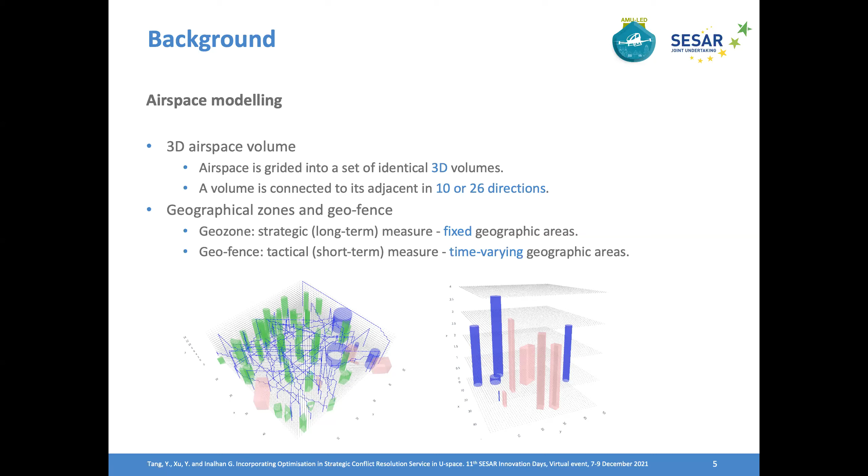Next, as stated in CORUS, to enable effective operations, the strategic conflict resolution service requires precise operation plans given the 4D trajectory to be flown. Well, obviously, to use the airspace efficiently, it requires the amount of buffer space around flights to be minimized.

However, some operations are not very precisely plannable for different reasons. And there are some discussions on how to identify the uncertainty buffers. In this study, we are working on...

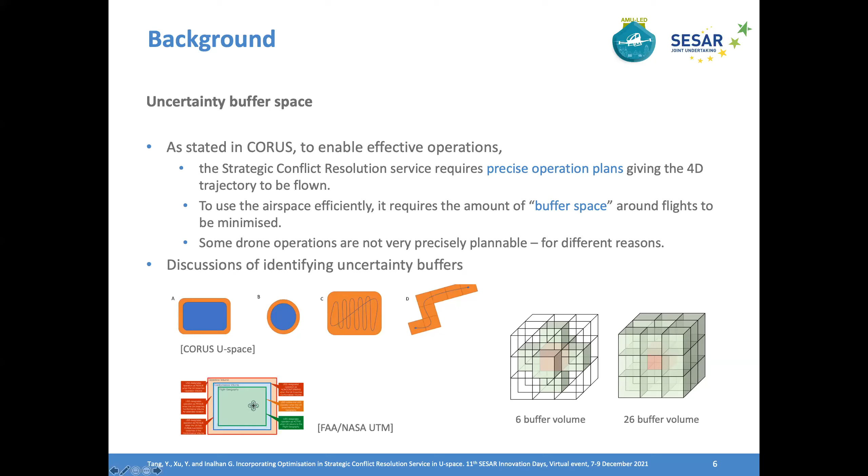As we are working on a gridded airspace, it is quite natural to consider the adjacent volumes of the essential point as the buffer volumes. For instance, imagine this red volume is the essential volume on the original trajectory. Then we can consider those 6 ones as the buffer volume, or 26, or even more, depending on the precision of the flight plan.

This setting actually raises this question: for linear operations, a specific volume can be an essential volume and a buffer volume at the same time. See this figure, example of a linear flight. The left side is the essential volume, the right side is added with the buffers. As you can see, a specific airspace can be an essential volume and a buffer volume at the same time, or it can be a buffer but associated to various essential volumes, as you can see.

And this actually changes the way how we define the flight plans for linear flights. To cope with this, we enforce the timestamps of the buffers to remain the same as their corresponding essential volumes. For area operations, it is more straightforward, as the whole period of time will be blocked from takeoff to landing. So the buffer volumes can be considered as a set of extended essential volumes.

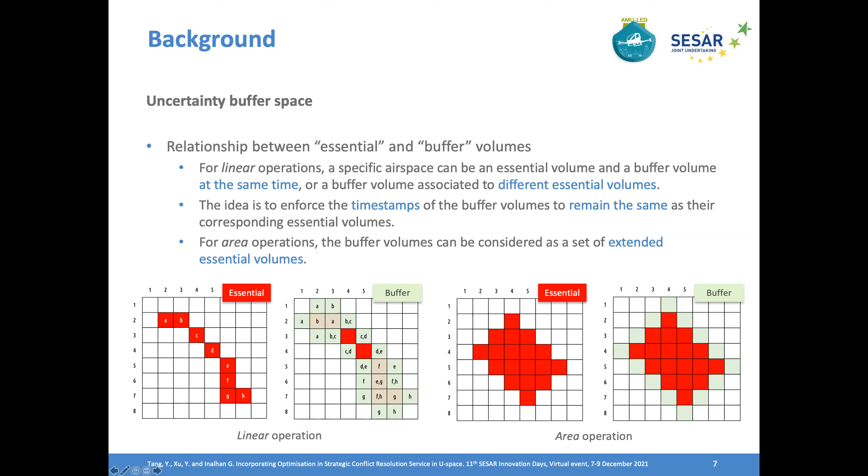Now, based on the specific forms of the flight plans we have just discussed, let us first use the FCFS approach to perform the deconfliction. More precisely, instead of first come first served, we should probably call it first submitted, first served, because the flight plans will be processed according to their submission order rather than the scheduled takeoff or landing time. Thus, an implicit rule would be that the flight plan submitted early will have an absolute higher priority than the later ones, unless there is a very high priority flight that requires a rerun of the process.

Here is the pseudo-algorithm for the FCFS approach. Basically, the fundamental of this algorithm is to have a common airspace representation to indicate the occupancy status of the 3D airspace volumes.

Flight plans will be processed one by one. Once a group of volumes have been occupied by some early submitted flights during specific time periods, they will not be available for other flight plans submitted subsequently. Those flights will be delayed iteratively until all their concerned airspace volumes have been cleared. In such a case, the new flight plan will take that time and space and extend the occupancy time with the length of the separation minima.

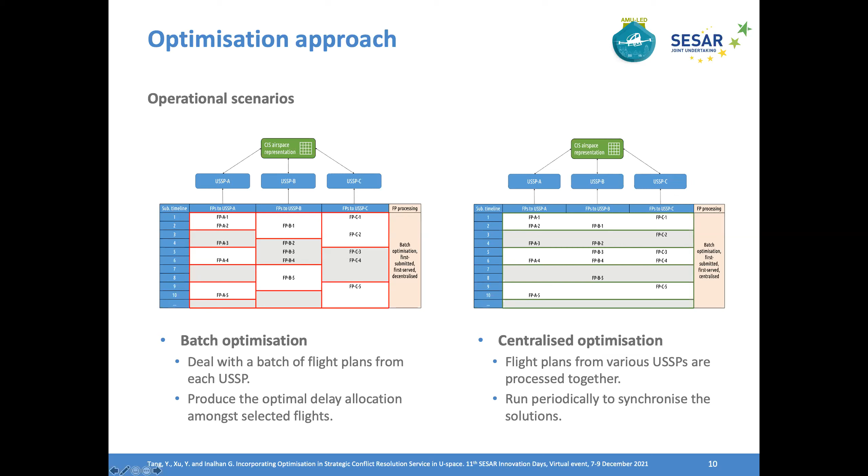Now, one may argue that such a centralized architecture may not be in line with what is expected from the CONOPS. Thus, we have considered a way to convert the centralized optimization towards a decentralized coordination scheme. Traditionally, as shown in this diagram, it is assumed that all the input, like the flight plans, are collected from the USSPs as a broker, to the same workspace, and then a central unit, for instance like a Common Information Service Provider, will compute the global optimal solution. This is a traditional centralized architecture.

But the model proposed in this study allows us to break down the single problem into various subproblems through a dedicated mathematical approach. It is envisioned that the operators submit the flight plans to the subscribed USSPs, and each USSP locally manages the database of the flight plans within its own workspace. A central unit is still required, but its main function will be limited to coordination tasks, exchanging specific information across associated USSPs. Using this scheme, we expect to obtain the same global optima as if in a centralized way.

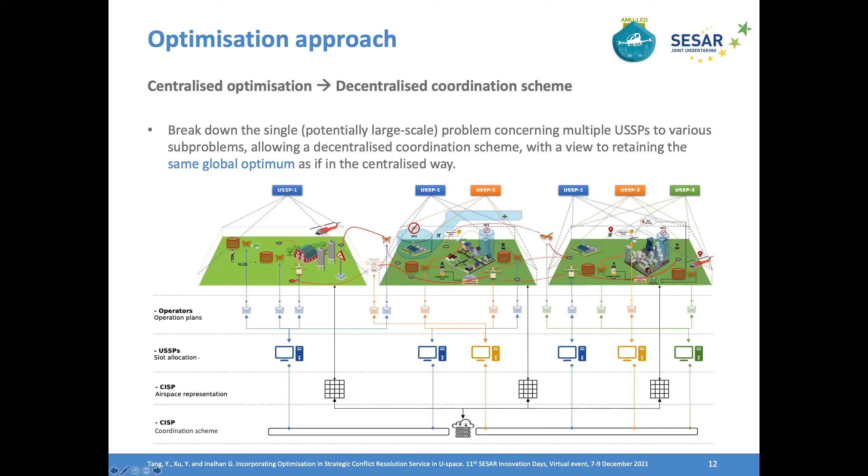Okay, some quick brief about the model formulation. In general, the objective function is to minimize the overall delay costs for both linear and area flights. A weighted cost can be specified for an individual flight to reflect its priority level. As presented, some operational constraints are specified based on their submitted flight plans, which of course are different between linear and area flights.

Well, the most important constraint is the separation assurance. The idea is that at each valid airspace volume, it can be only occupied by one flight within a valid sliding time window with the length of the separation minima. The reason I'm saying valid is because there would be some pre-processing to remove those volumes and times that are predicted to not have any conflict issues. By doing so, we can largely improve the model's computational performance.

In this figure, we have 3 linear flights using the same volume, reaching the same airspace volume at different times, as highlighted in red color. If we're using this format of flight plan similar to manned aviation, then it's quite simple. We just need to move this time window from top to bottom and add up every cell inside, and ensure that there will be no more than one cell occupied at one time.

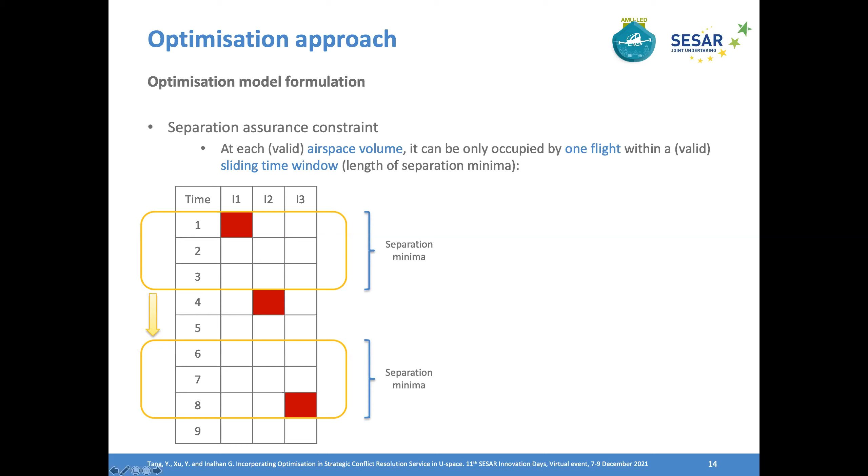However, once we have considered buffer volumes and special area flight plans, it becomes a little tricky. For instance, in the bottom box here, we captured two cells occupied: one here, the other here, but they are actually from the same flight, L3, as you can see. One represents the essential volume, and the other is actually its buffer volume. To cope with this issue, we have devised a piecewise function and converted it into a linear formulation and incorporated it in the whole model.

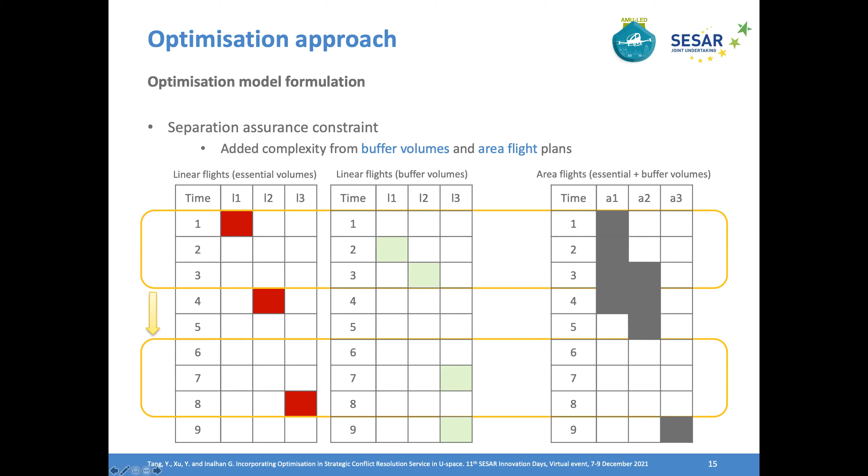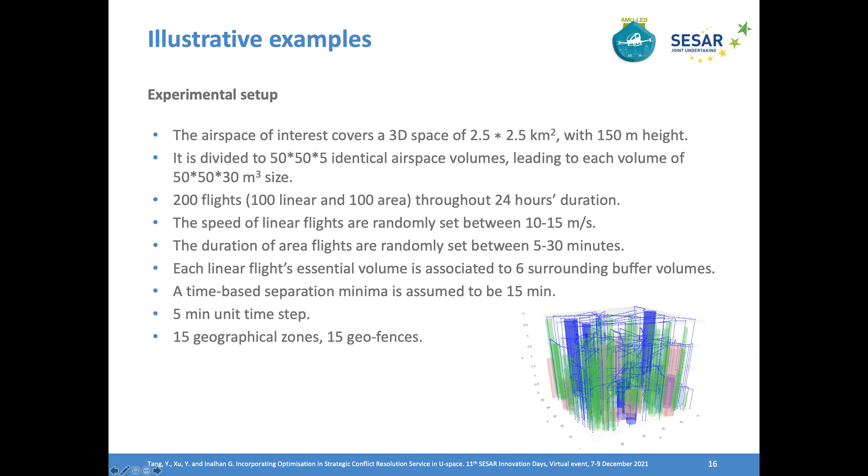Let's see some illustrative examples. The experimental setup is presented here. A 3D airspace of 2.5 by 2.5 square kilometers with 150 meters height is divided into 50 times 50 times 5 identical airspace volumes, and 200 flights coexist during a 24-hour duration. The initial flight plans are randomly generated, including their submission order. Of course, any of these numbers can be adjusted; we simply chose these values for illustrative purpose.

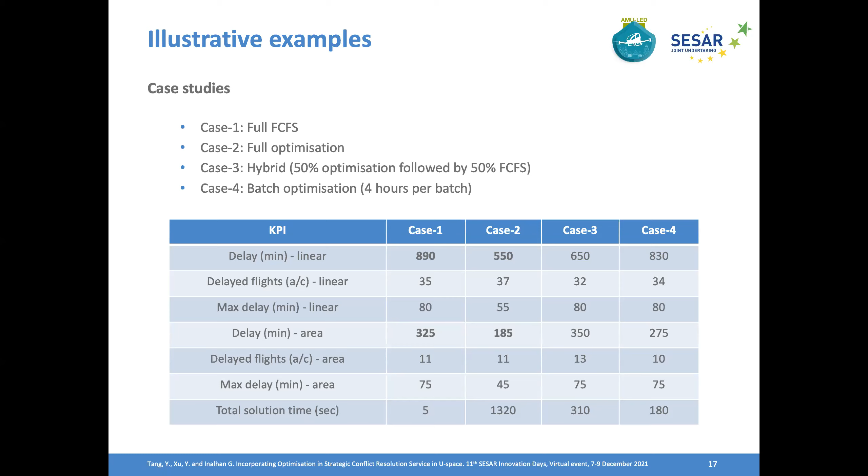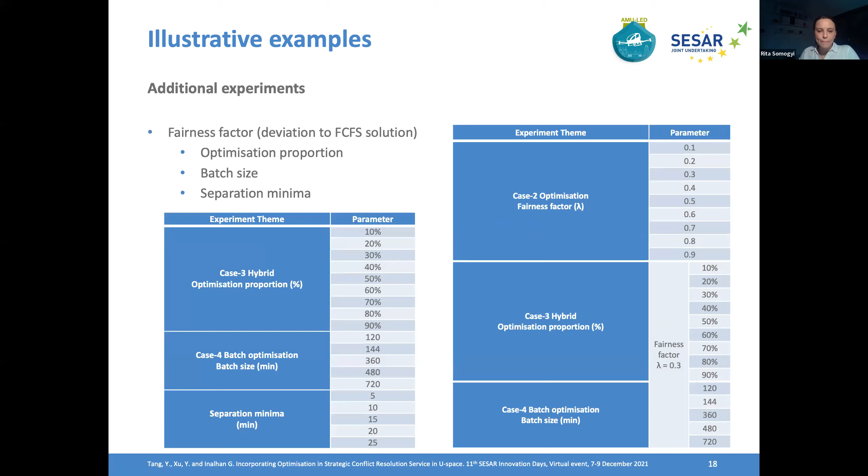Some additional experiments have been conducted. Remember the objective function of optimization was to minimize the total delay cost, which is purely aimed at efficiency. What if we use the solution of FCFS as a reference and include the deviation to FCFS for each individual flight in the objective function? This could be considered a way to balance efficiency and fairness, and we have tested different weighted costs between them, as listed in the table.

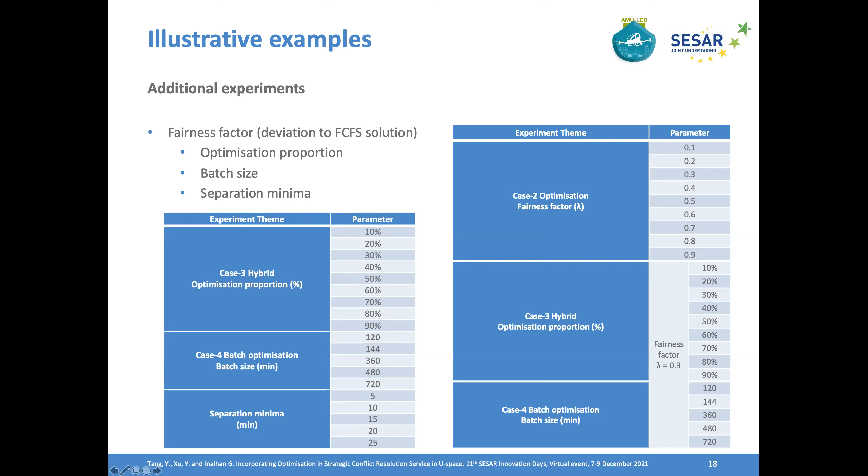In addition, some sensitivity analysis have been performed, including the optimization proportion, batch size, separation minima, conducted in both situations, with or without the fairness concern. Here are the results as expected: the higher the fairness factor is, the more delays required, and of course, closer to the FCFS solution.

For case 3, the hybrid mode, if we have more flights submitted at an early stage, solved with optimization, then the total delay will decrease. For case 4, if more flights are involved in each optimization batch, then efficiency will improve a lot. This shows the potential advantage of using the decentralized coordination scheme that we mentioned previously.

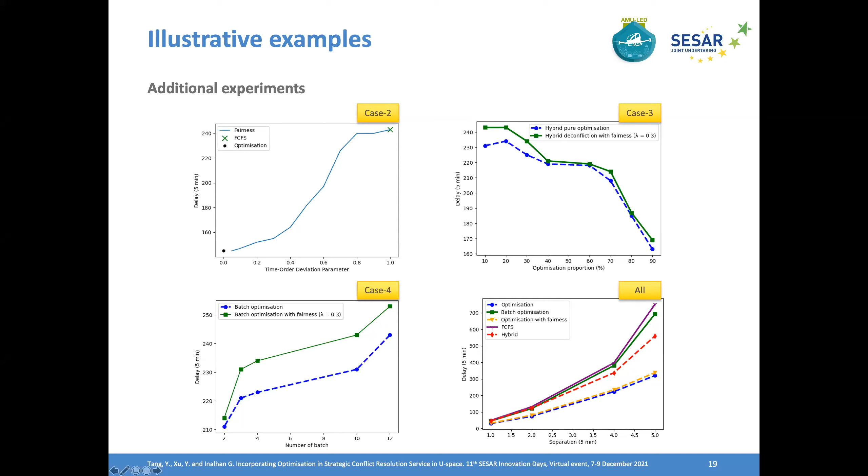Finally, the impact of changing separation minima can be seen in the last figure. Basically, the more challenging this deconfliction problem is, the more benefits can be achieved by using the optimization approach than the FCFS approach.

Conclusions and future work. In this study, an optimization model for strategic conflict resolution is proposed with a view to addressing the inefficiency of the existing FCFS approach. Depending on the availability of flight plans and the time when decisions need to be made, the optimization approach can be customized jointly with the FCFS approach.

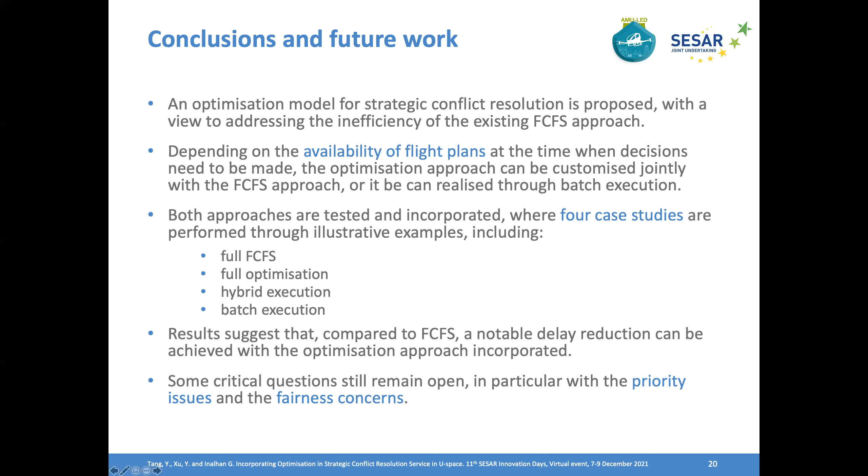We have considered four case studies, including FCFS, optimization, and a hybrid plus batch execution one. Results suggest that compared with FCFS, notable delay reduction can be achieved with the optimization approach incorporated. Some critical questions still remain open, in particular the priority issue and fairness concerns.

I'll quickly close this presentation. One of the key directions we are aiming at is to incorporate this RTTA concept, reasonable time to act, which is a very interesting topic proposed in CORUS.

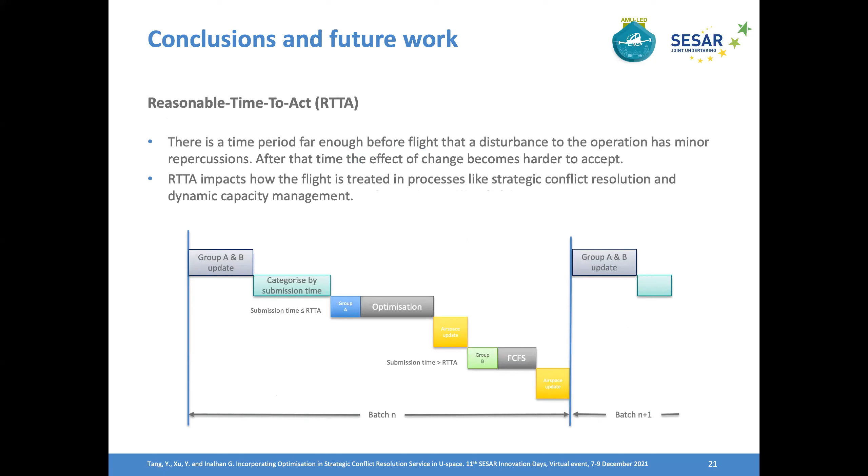Basically the idea is that if an operation plan has been submitted before its RTTA, then the service will protect the flight from any further change. And if the operation plan is submitted later than its RTTA, then it will be processed at a disadvantage. So we are actually working on this RTTA implementation, incorporating both this optimization and FCFS into an integrated scheme following this RTTA principle.

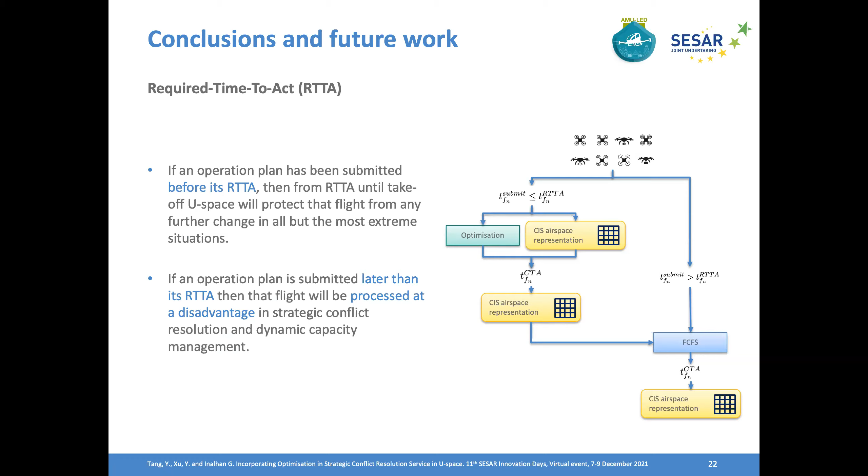Thank you very much, especially for adding this very last slide, which if I understand is even further than already submitted in your article. So this is very interesting indeed. We have received a question in the Q&A session, and I encourage our listeners and audience to include any further questions here if you have. Jorge has asked, how do you think you should deal with the airspace equity issues? And also I saw in your presentation that you mentioned fairness as a question. Do you have any idea on that already?

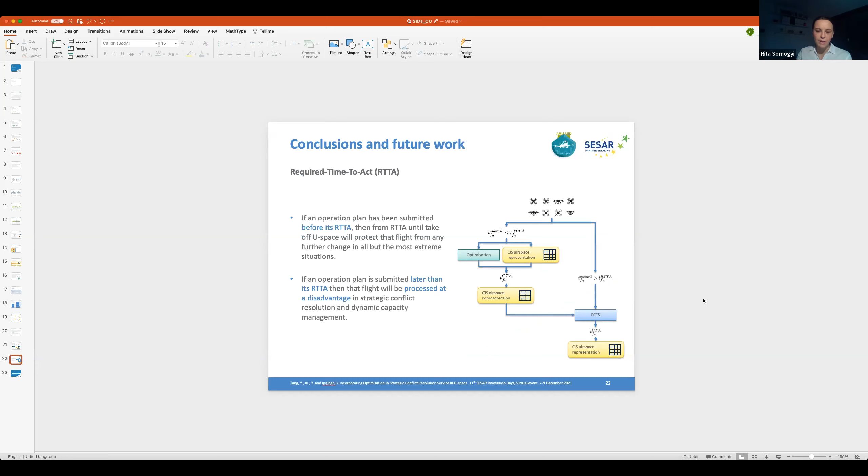The fairness issue you were talking about, right? Yes. In this particular study, we have tried to touch upon these issues, but not in a very detailed, systematic way, because this topic is very important, I would say.

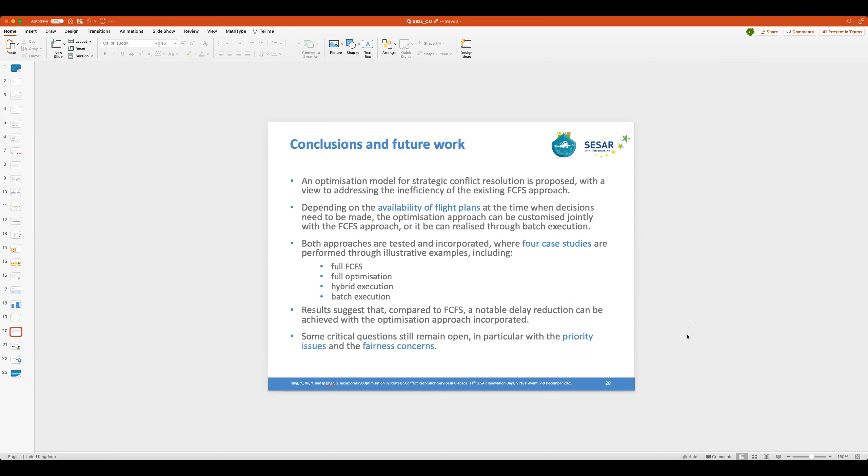From our study, what we have done is just try to use the FCFS solution as a reference, and we put a trade-off between efficiency and fairness both in our objective function of the optimization model, because we assume that FCFS is the kind of fairness criteria that can gain the consensus from different operators. So we put them together in the objective function and use different weighted factors to look at the trade-off between efficiency and fairness.

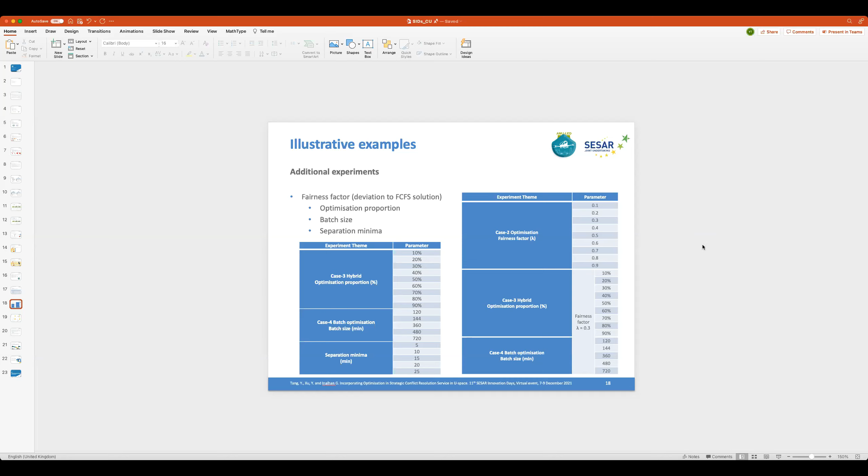But yes, in our future work, this is one of the issues that needs to be looked into. I would say this RTTA concept is actually one of the ways to provide more flexibility in addressing this issue. But since we haven't finalized the work, I would not comment on the final solution, and we will update it in future work.

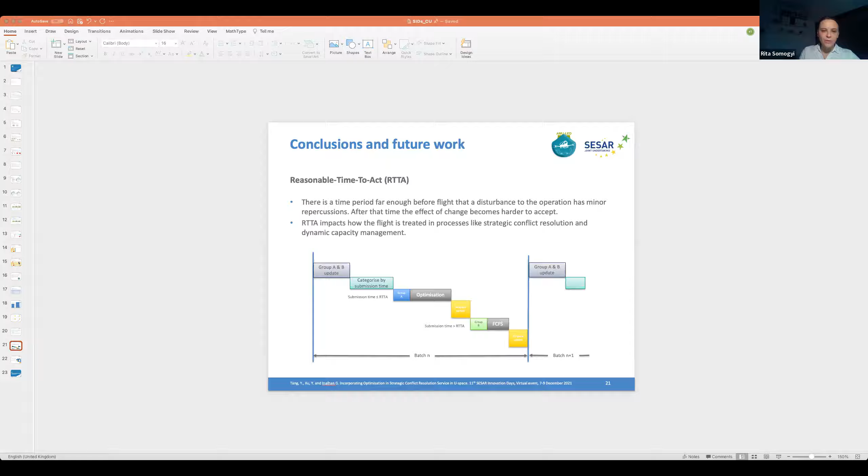I would like to ask the organizers, have we been able to establish a voice connection to our next presenter? Because it was a question. We have not been able to contact him, but I've seen he was able to connect to audio, so I think he might be able to talk. Okay, César, can you hear us? And can you talk to us, of course? He's not unmuting.

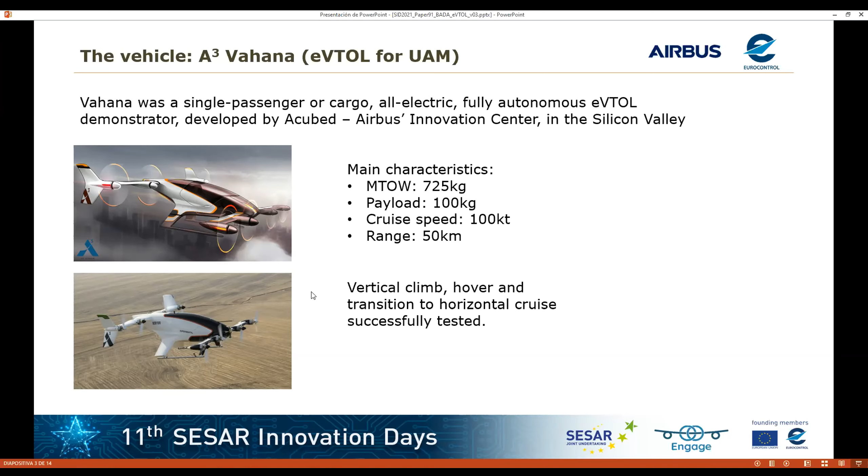So let's go to the math. We are going to talk about 4 following topics: the motion equations, power required for horizontal flight, propulsion, and operations.

So the motion equations are based on the modeling approach of BADA-H. BADA-H is a performance model recently developed by Eurocontrol to model helicopter performances. Our objective is to analyze the performance of the vehicle from an air traffic management point of view, so we need to simplify the problem. For us, there is no need to calculate the angle of attack, the side slip, the control surface angles of deflection, or other variables that are more related to the handling qualities of the vehicle.

So instead of solving the 6 degrees of freedom equations of the rigid body, we use the equation of energy that we are showing on the screen. This equation correlates the power delivered by the propulsion system, called here P, the acceleration, the derivative of speed with regard to time, and the rate of climb or descent, the derivative of height or altitude with regard to time, with the power required to perform horizontal flight at constant speed. Here in the equation, P sub req.

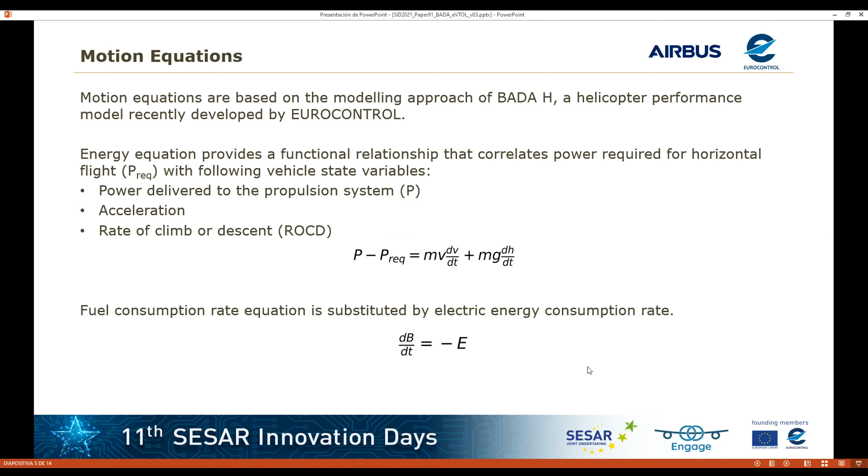So what is the objective of our aircraft performance model? The objective is to obtain a mathematical formula, or means, that allows us to calculate the power required for horizontal flight and the energy consumption rate for any flight point. If we obtain these mathematical relationships, with the help of the energy equation, we can integrate the trajectory of the vehicle and obtain the evolution of the energy consumption along the flight.

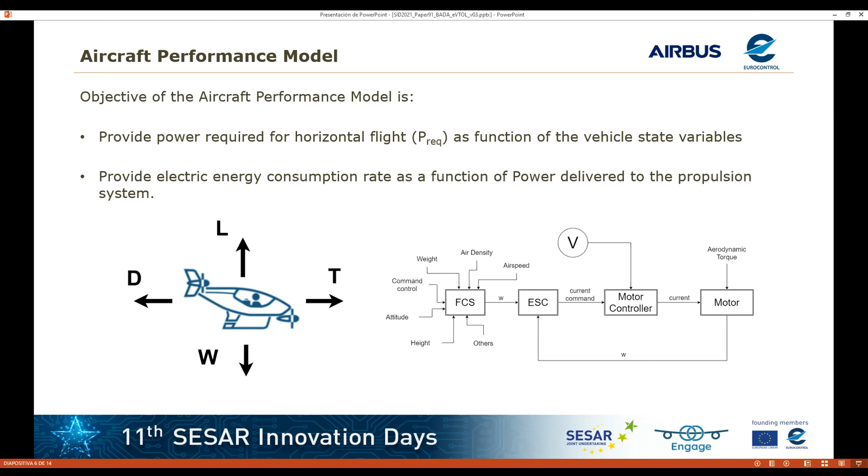So this is very easy to tell. It's not so easy to achieve, because rotorcraft have more complex aerodynamics than fixed-wing airplanes, and also multi-rotor aircraft are more complex than single rotor. And if you put the multiple rotors in tilt wings, this is also more complex. And Vahana has 8 rotors on tilt wings. So we cannot introduce a CFD calculation in our simulation, because this would be very computationally costly. So we need a more simple approach.

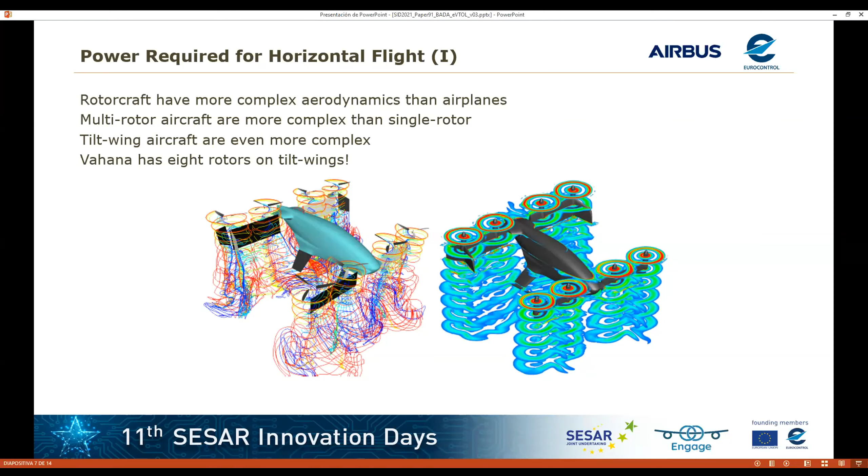What we have done is to use the already existing BADA helicopter model formulas and mathematically tune them to reproduce the main aspects of Vahana aerodynamics. Currently, the BADA helicopter model calculates the power required for horizontal flight as the product of a characteristic power by a non-dimensional coefficient, calculated by this huge formula with plenty of coefficients that depend on the traction coefficient and the advance ratio of the rotor. These 5 C sub P R coefficients are the ones that characterize the specific aircraft, because these formulas are generic for any helicopter, and only the values of these coefficients are used to characterize each single aircraft.

But this was not enough for us because we were not able to reproduce the power required. So we have introduced another extra degree of freedom: allowing the model to use variable rotor speed. For helicopters, it is considered that rotor angular speed is constant. But for our model, we have introduced a dependency of this rotor angular speed with the flight speed, as a fifth degree polynomial of the speed.

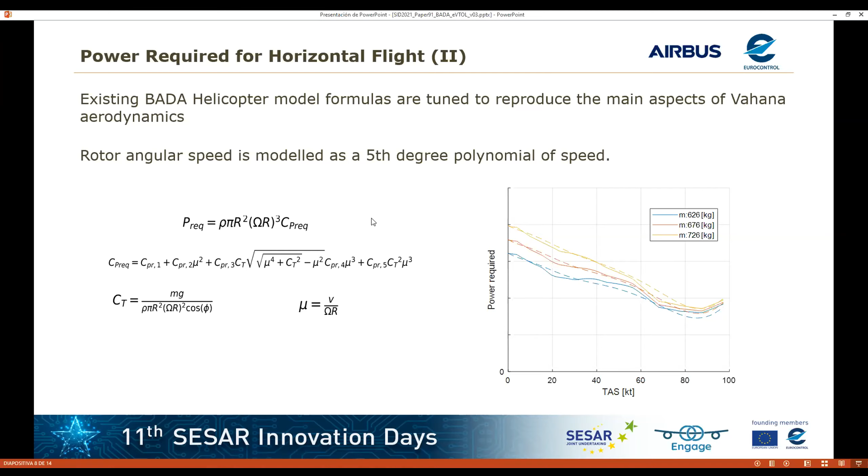Here you can see in the chart, with solid lines we have the original Vahana data, and with the other line, the output of the model. There are some irregularities in the original data that cannot be reproduced in a certain zone, some bumps. But we are satisfied with the overall behavior of the model.

Propulsion is another key point. Electric engines are actually simpler to model than jet or piston engines because they have constant efficiency, and there is no big impact of altitude or temperature on power output.

Nevertheless, batteries are much more complex to model than fuel. Power output depends on the state of charge of the battery, the ratio between the actual energy stored in the battery and the total amount it can store, and the temperature. Also, this capacity depends on the state of health of the battery and the history of charge-discharge cycles, as hysteresis also has an impact on the capacity.

But as all this casuistry is very complex to model, we have had to settle on very clear objectives for ourselves. We need to calculate power losses due to heat dissipation in the battery, and we need to calculate the limitations that the battery has in producing instant power for the vehicle.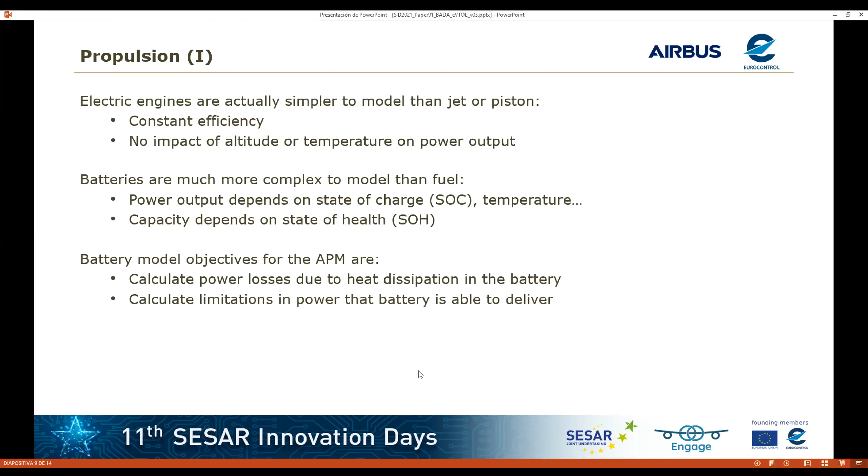So for power loss calculation, we took a very simple approach. The battery is modeled as a variable voltage generator connected to a resistor. And the output voltage of the battery and this internal resistance are modeled as a function of the state of charge of the battery and the current delivered to the system.

These formulas and the ones used for the power requires are generic. Our intention is to apply them for a lot of types of vehicles, but the coefficients shown here, these V0 to V4, the R0 to R4, and RI0 to RI2, are the ones used to particularize them for each vehicle. For the moment, no influence of the temperature is introduced, as it was assumed that the refrigeration system of the vehicle will keep battery temperature control and in the desired working range.

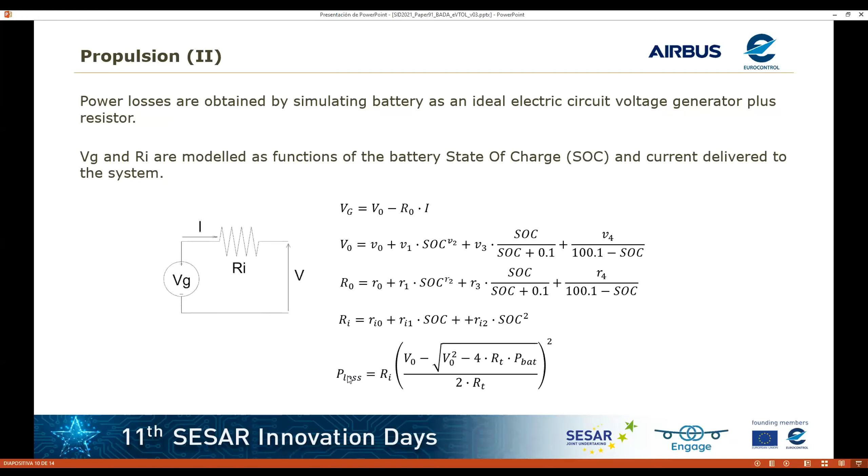And it is also found that the state of charge of the battery governs which one of these two restrictions apply. For the upper part of the state of charge, the limitation in current is the one that applies, and for the lower part of the state of charge, the one that is imposing the limitation is the voltage, being the transition in a middle point that depends on the battery type.

This is really a key feature because this shows that the performance of the vehicle is not only limited by the performance of the motor, the rotor, or the control surfaces, but also by the amount of power that the battery can deliver. This could be also critical for the final phase of the flight, when the batteries are reaching the lower part of the state of charge range, and probably some maneuvers cannot be reachable by the vehicle.

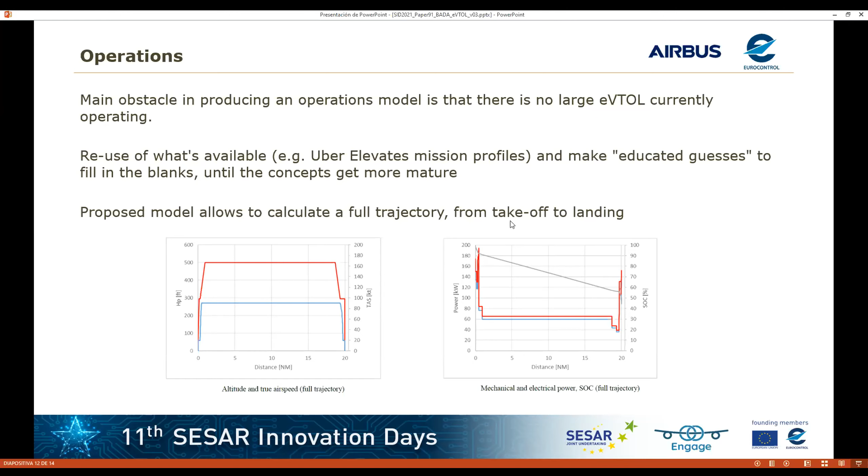And this is your 15th minute, but I see that you are actually reaching just the end of your presentation. Yes, just 2 slides and I will finish, for known limitations and future work.

Once the model has been produced, there are two main questions. Is the model general enough? And what is to be done in the future to improve it?

And from our point of view, the weakest point of the model is clearly the lack of information available. Even though we are using real vehicle data, it is necessary to prove the formulation against other vehicles. This will allow us to refine the formulation or confirm our assumption, but this is clearly pending work to be done in the future.

And of course, as previously stated, the operations will really need more work. Probably future research work in this topic will help to fill this gap.

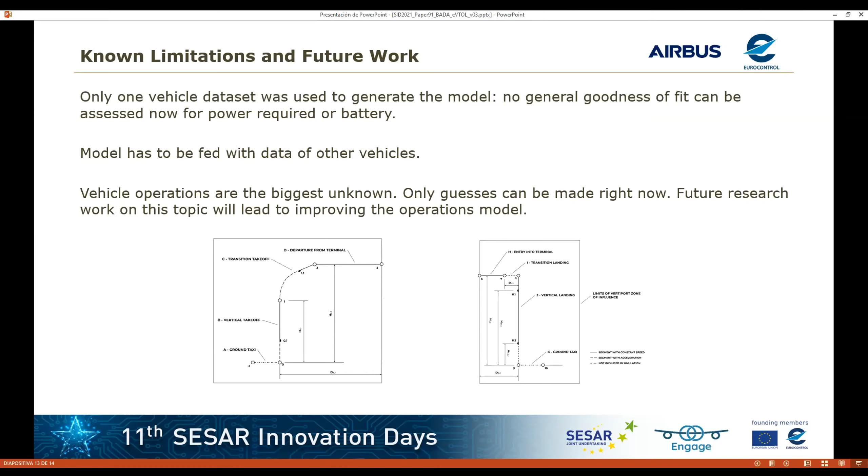And just to conclude, for conclusions, 3 points. First of all, Eurocontrol and Airbus UTM, we have developed a new UAM vehicle model based on data from real flying eVTOL. And we think that even with all its weakness, it is a model standing on experimental data, which is a very, very important point.

Also, the model is based on a currently implemented BADA and BADA for helicopter, that has shown to be precise enough for traffic management applications, and it's already used in multiple applications. And just to finalize, even though the physical model needs to be validated with other vehicles, we think it's a good starting point for future development.

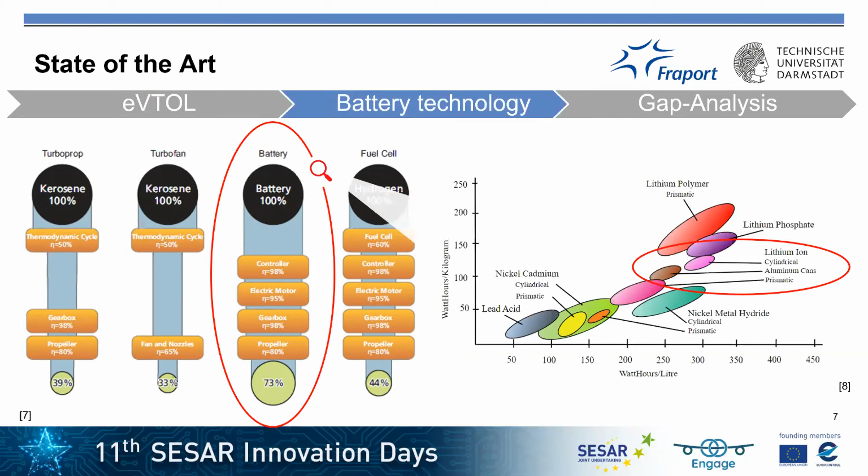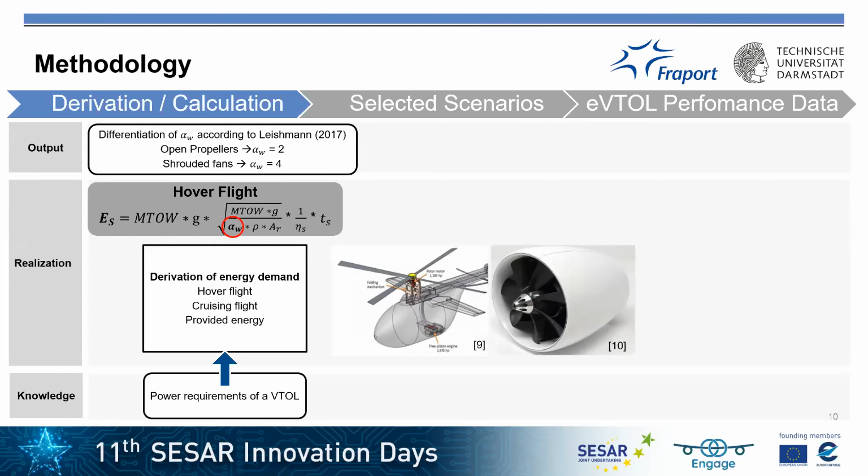Coming to the methodic we used to calculate the ranges: first, for realization, we have to derive the energy demand during hover flight, cruising flight, and the provided energy. I want to mention here that we had two different configurations, open propellers and shrouded fans, according to Leishman, regarding this contraction parameter alpha W, which is really an important parameter. For our calculations, we come up with this range equation, which you can see over there.

And we neglected during our calculations a few points. What I want to highlight here is the acceleration and deceleration phases, the downwash effects, startup of propellers and engines, electrical consumers, and explicitly the consideration of ascent and descent phases.

We used the published eVTOL characteristics, and also realistic references for influencing factors like temperature and wind on the battery, which is also common in the automotive industry, to calculate in the end, in a macro tool, the realistic ranges and also the maximum possible hovering time.

So we have chosen some selected scenarios and done a sensitivity analysis, as you can see here, based on the flight altitude of 500 meters above sea level with the connected air density, and different hover times from 1 to 10 minutes.

We used weather data based on the CDC open data of the DWD, Deutscher Wetterdienst, from Frankfurt, especially for the region of Frankfurt, for the key parameters: air temperature, like the 5% coldest, the average, and 5% warmest windy days. We also considered headwind speed, like no headwind speed, the 5% windiest days, the average, and the maximum wind speed during those conditions in the region of Frankfurt.

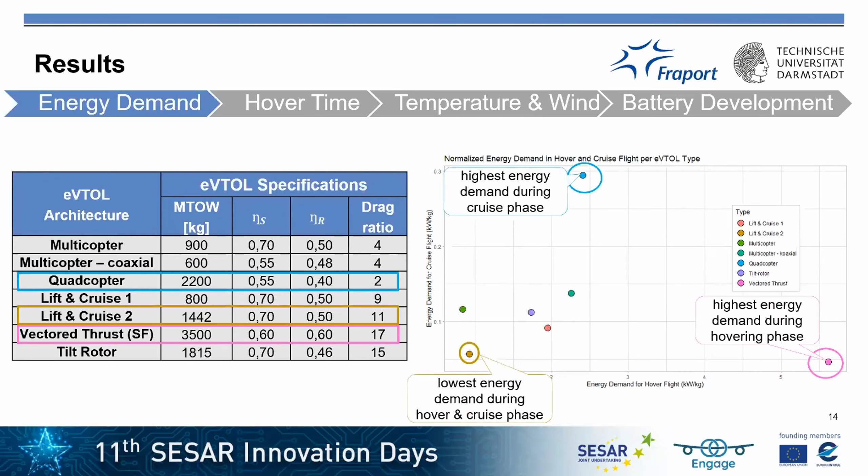As you can see here, it's clear that the vectored thrust model has the highest energy demand during the hovering phase because of the weight and the hover efficiency. Compared to that, the quadcopter has the highest energy demand during cruising flight because of the weight and the bad cruising efficiency. The lowest energy demand during hover and cruising phase is the eVTOL type lift and cruise model number 2, resulting from the efficient parameters during these phases.

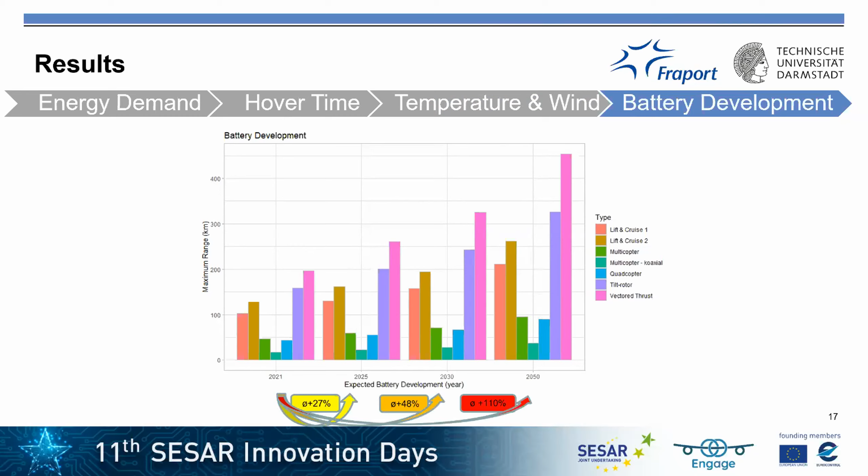So let me come up with a conclusion about the study. Based on the calculation of the realistic ranges, it can be concluded that the results under the most optimal conditions matched with the specified range of eVTOL manufacturers.

The analysis showed the most influential factors like the hover time, the drag ratio, the battery capacity, especially also the specific energy density, the weight, the ambient temperature, and their influences. In real operation scenarios, such as low temperatures like winter conditions nowadays, and long hover phases, based on the assumptions of manufacturers, the specified ranges cannot be met.

But the paper addresses a global perspective, a base for regulation for eVTOLs like the SC-VTOL, and also a better, optimized, and thorough traffic management system. On a local perspective, airports like Fraport can plan flight operations and also estimate business and use cases with eVTOLs, and estimate besides this the economics and the investment in that topic.

Our next steps lead to 4 major issues of urban air mobility that will need to be addressed in future research. First of all, all the calculations we have done have only been theoretical, so we have to do some more test flights to evaluate the details. Besides this, we can also consider hybrid eVTOLs and hydrogen solutions as well.